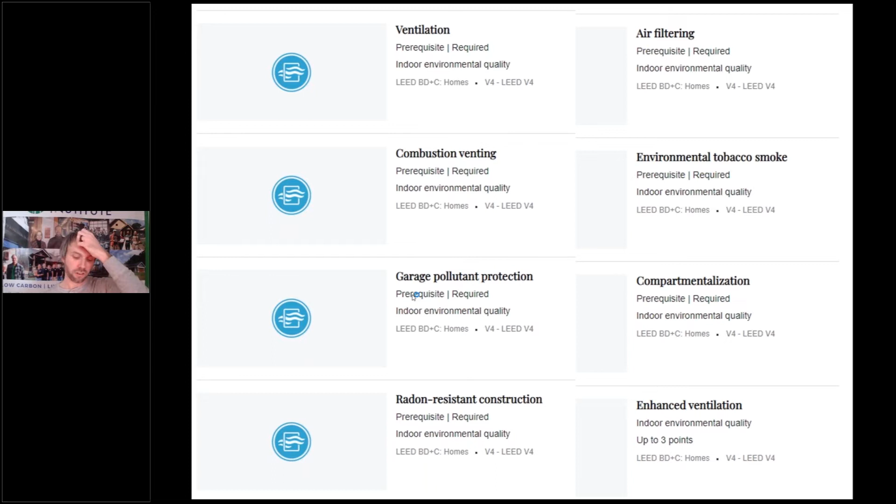Now, Passive House is not just an energy efficiency standard, and you'll hear a lot more about that, but how it fits into LEED is that it requires Indoor airPLUS certification, which basically covers many of the requirements in the Environmental Quality section of LEED: ventilation, combustion venting, garage pollutant protection, radon resistant construction, air filtering, environmental tobacco smoke, compartmentalization, sealed units - very important to keep air we breathe from going other places, especially nowadays - and enhanced ventilation. All of these items are taken care of under the Indoor airPLUS program, which is covered under Passive House now for the US version.

And so there, again, even more points taken care of there as far as your prerequisites go, and a couple points in air quality. Really goes a long way and shows that the LEED and Passive House program go hand in hand. So we'll talk a little bit more about that later.

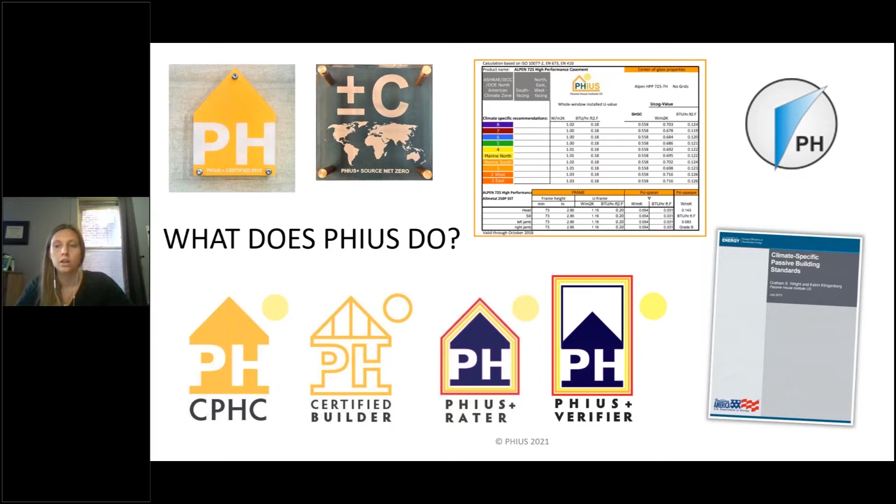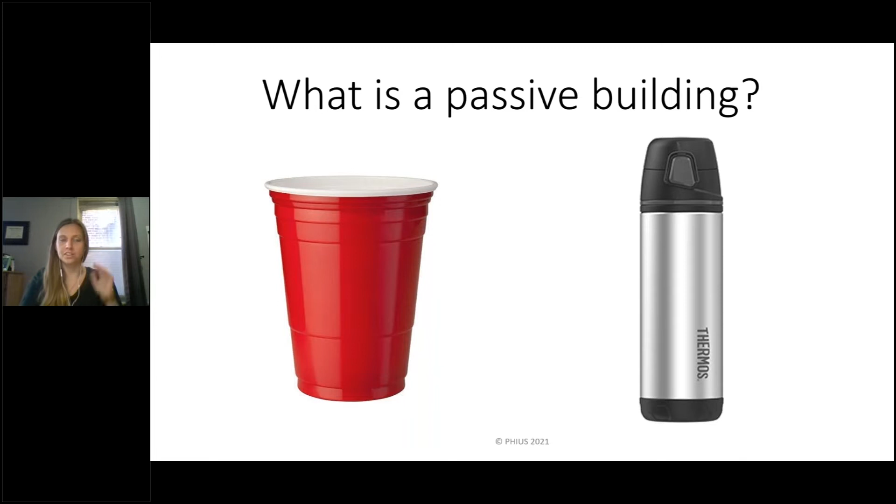So in the highest level concept, you have a basic minimum functioning thing that must meet the requirements, and that's where you can think of like a baseline or code building. And then you have something that's a little more thoughtful in design in terms of air sealing and thermal protection and durability and quality. So that's just a very high level concept about passive building.

And then I briefly, before we dove in, wanted to talk about what a passive building standard does. And I'm glad you mentioned all of that stuff up front, Brett, about the prerequisite programs, Energy Star and EPA and Indoor airPLUS.

Those are all really good programs that require some quality elements that PHIUS leans on in terms of moisture design and indoor air quality and things like that that don't necessarily show up in kilowatt hours. They're not things that passive building on its own can achieve. So I'm going to talk about what passive building can achieve, but it can't do all of these things on its own just using passive. So you have to rely on those co-requisite programs to ensure a quality building. You can't get that alone by just using passive measures.

So the PHIUS passive building standard requires design for low heating and cooling loads and bills. So that's peak and then annual, and I'll talk about that a little later. It requires design for low net energy use overall. So we use a source energy metric, and that's also our zero program, which I'll talk about. And then it also requires quality construction, which is this on-site quality assurance, third-party verified programs that are ensuring the building is a quality built building.

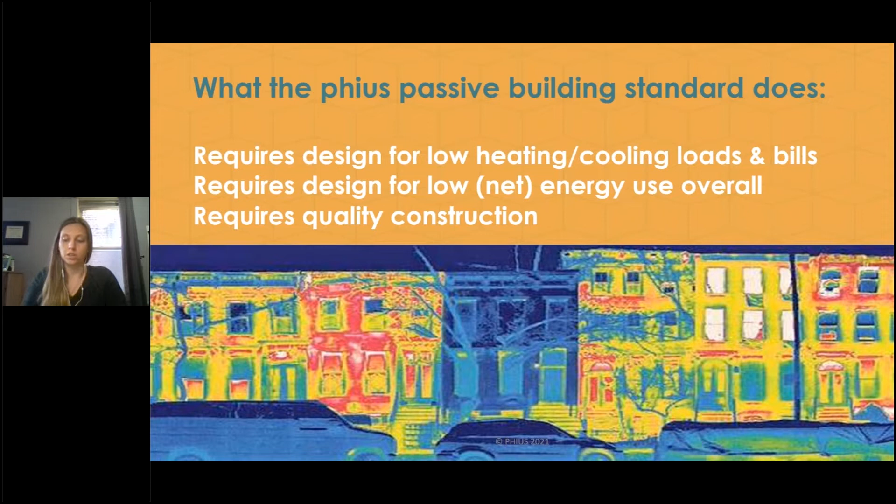Okay, so just a little bit of history. The first kind of experimental homes with passive solar stuff actually happened in the States in Urbana, Illinois. I'm in Chicago, I didn't mention that. So just downstate of here, actually where University of Illinois is. And that was the Building Research Council, and they came up with this low-cal home. Similar concept to passive solar.

And then during the oil embargo in the late 70s, early 80s, Canada said, okay, we really need to take advantage of some of these passive solar strategies to reduce the heating load. And they had all of these design strategies, really more passive solar than passive building, which is important to understand. They were more of a heating dominated situation, lots of solar gain, mass, glass, but they knew super insulation and air tightness and solar gain could help you reduce a heating load, right? They just didn't have really defined targets, but they had all the concepts down.

And then in the mid 90s, those concepts were utilized by the Passive House Institute in Germany that created a pass-fail passive building standard. And what this did is it quantified those passive building conservation measures and said, hey, you need to take these and go to this certain amount of conservation. And that's how you apply passive building practices. And you can go this far and meet these certain metrics, and that defined what a passive building was. And that standard works really well for passive houses in Germany, and was applied for the European climate zones.

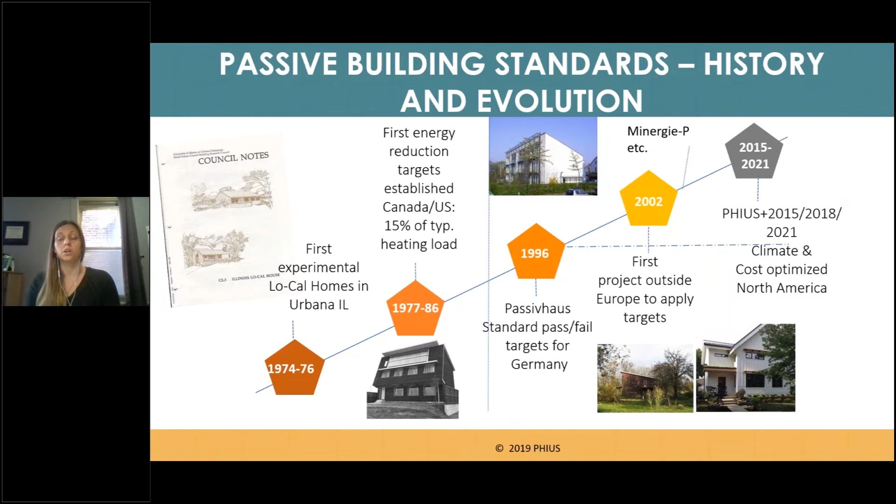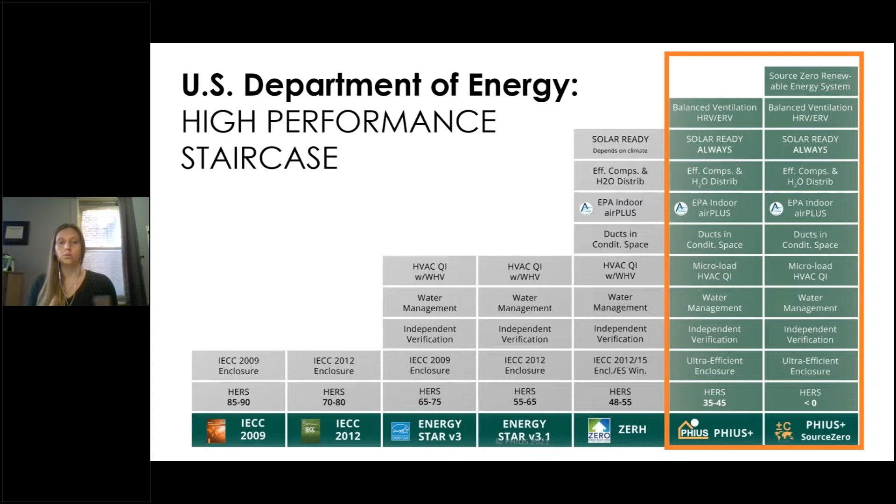Okay, so to put this in a zoomed out context, this is the US Department of Energy's high performance staircase. You can see on the far left, we're starting with code, IECC 2009-12, Energy Star, ZERH, the Zero Energy Ready Home Program. And then PHIUS builds upon those and goes a little bit further in different arenas to get to a zero building. So we have the ZERH, which is zero energy ready. Then we reduce the loads even more, add a little bit more related to ventilation quality. And then you can take renewables and get to zero. So it's a natural progression on the predefined programs we have in the US.

Okay, so now into the passive building principles. So there's 5 main principles that we generally talk about, and these principles are trying to achieve 3 different control strategies. So we have thermal control, radiation control, and air control. Thermal control is achieved through continuous insulation, and I'll talk about each of these individually. So thermal control, continuous insulation are kind of that sweater on the building, not the same size sweater for every climate, but a sweater or a coat, or a nice continuous layer of insulation.

We have radiation control, which is controlled by optimized windows and solar gains. So notice this is not passive solar. It's not all the gains you want. It's not all south glass. It's really optimizing the window and solar gain to your climate. And that's what the kind of performance targets that we'll talk about are trying to gear you to. There's limits on heating and also limits on cooling, so that you can't really go too far in either direction. You need to optimize.

And then there's air control. So this is achieved through 2 strategies. The first, super important for energy savings and durability, is airtight construction. And then because you seal up the building so tight, you now need to provide intentional balanced ventilation, and then with heat recovery, so you're not losing quite a bit of energy as you continually provide fresh air to the space. So those 2 come in tandem. You really should not do one without the other, especially when you're getting down to passive house levels of air tightness. You need that balanced ventilation with heat recovery.

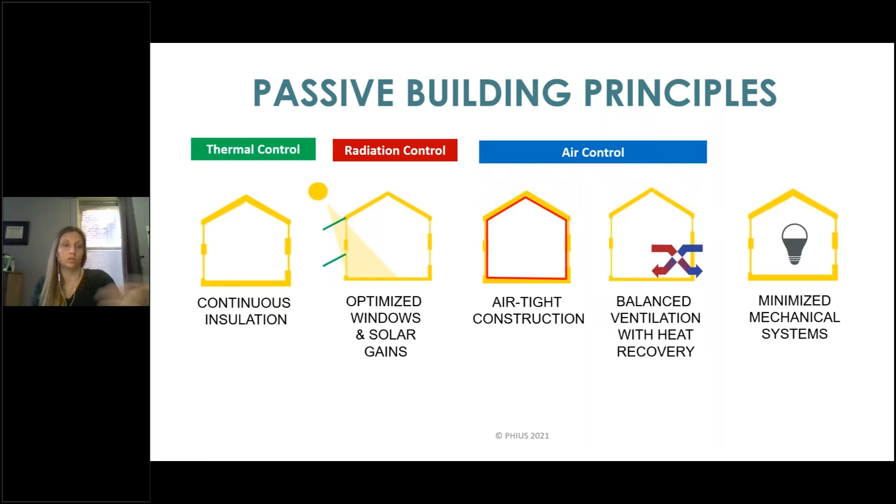Okay, so just a little bit on each. So the first is continuous insulation. This is a fairly intuitive concept, but really not just focusing on the construction of an individual component itself, like a wall, but also focusing on how that interconnects with the other components in the building, like the windows, the floor, the roof. So reducing the thermal bridging at connections between components, as well as within structural framing of an individual component. So you want the insulation to be continuous all throughout the building thermal boundary.

And one way to think about thermal bridging, if you're not familiar, is you have a nice sleeping bag, right? If it's cold out, you get in that sleeping bag and you roll over and you feel that zipper. That zipper is a thermal bridge, and that's the kind of path of least resistance for thermal transfer between the inside and outside of that sleeping bag. The sleeping bag's really well thought out, but then they have this conductive part that causes discomfort, and in buildings it could cause condensation, mold, other issues.

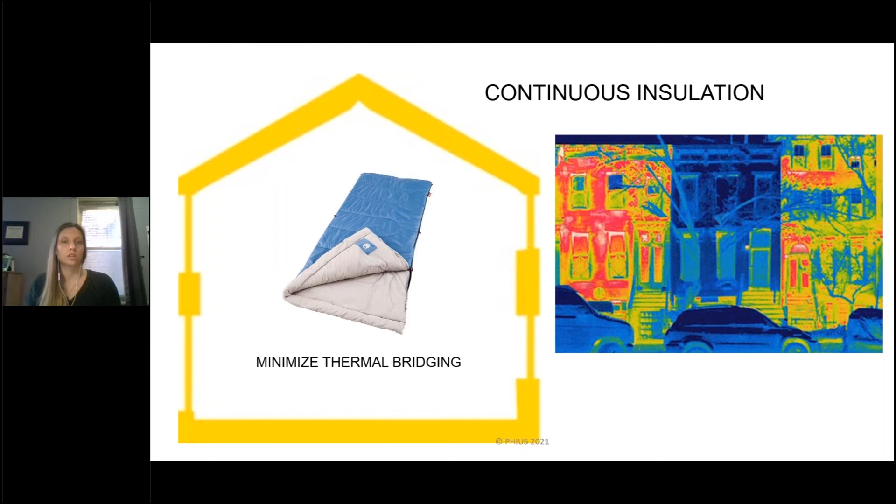Another thing about thermal bridging, shown here in the bottom, is that it provides for more livable space as well, especially in somewhere like this high rise. You can see on the left, they did not thermally break that balcony slab. So the balcony slab goes all the way from inside to outside, and that basically allows the cold to come in, or really the heat to go out. And what it's doing is it's creating a cold corner, which could have issues for mold, or it's just cold and you can't use that space.

So when you mitigate that thermal bridge or provide that thermal break, you're now creating kind of more uniform temperatures on the inside surface of that building, which again is good for comfort, but also building durability and things like that.

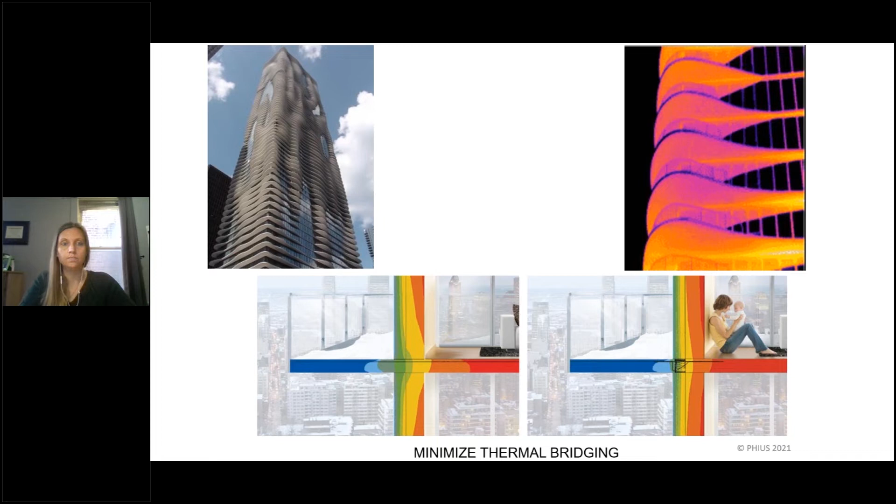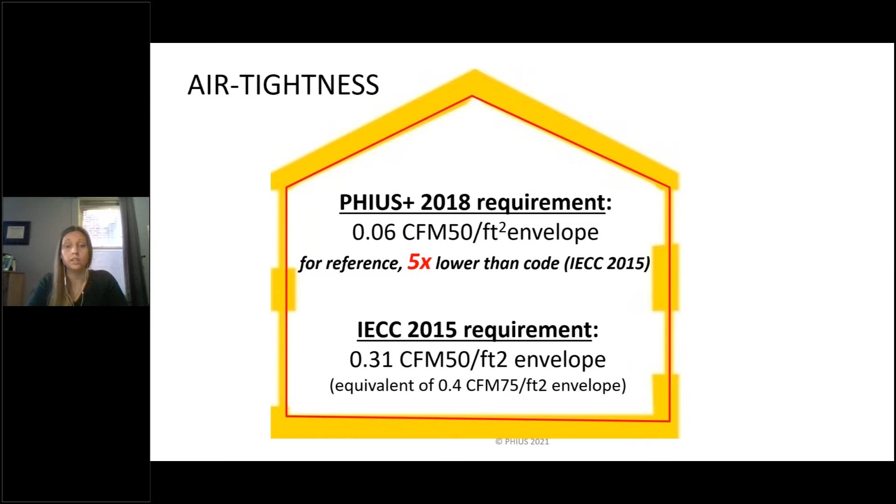Okay, so air tightness, another really key principle here. The PHIUS 2018 requirement, and 2021, sorry, missed that update there, is 0.06 CFM50 per square foot of envelope area. So it's a per square foot of shell area requirement, not an ACH requirement. But it's roughly 5 times lower than the IECC 2015, I think the requirement's the same, 2018 requirement. So it's tight. It's achievable. It's been achieved in hundreds of projects across North America, but it is tight. It's significantly tighter than code requires.

Okay, so in optimized windows and solar gain, it's pretty much required to use window frames with thermal breaks in them. And then oftentimes also, at least in climate zones maybe 4 and above, you're seeing triple pane glass in most buildings. Not all, but most. And also curtain wall systems and things like that in larger scale or commercial buildings. You're getting into kind of top of the end for the curtain wall systems that are available, triple pane glass and a thermally broken spandrel. So they exist, but it's definitely higher end of the window market.

And as I mentioned before, there's also shading strategies involved with this, depending on the building type and usage and orientation and all of that. There's ways to obviously allow for gain when you want it and block it when you don't.

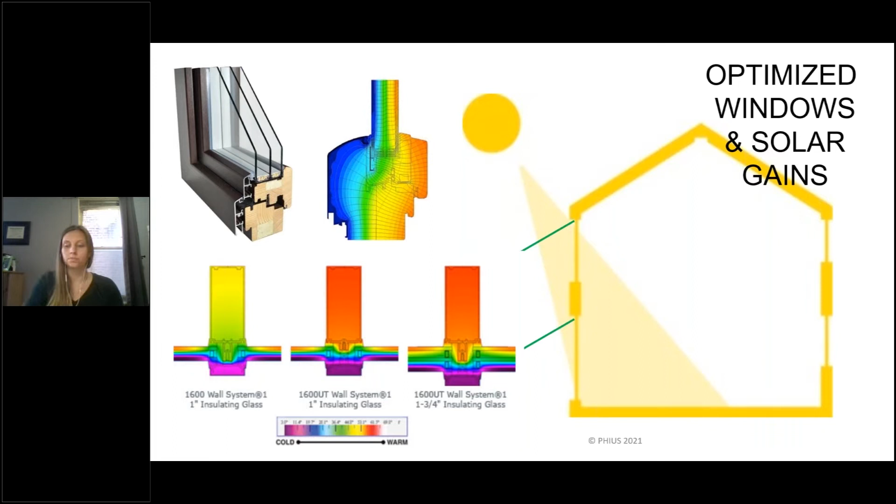Okay, so the balanced ventilation and heat recovery, again, remember, goes hand in hand with the air tightness. And this is basically using intentional openings in the building to provide fresh air in the living spaces and exhaust stale air in kitchens and bathrooms, maybe laundry spaces. So spaces where contaminants build up, you're exhausting, and spaces like living rooms, bedrooms, you're supplying fresh air. And it's a continuous thing.

And it's going through heat recovery at the core. So your outgoing air is passing through a core with your incoming air and exchanging that heat and moisture generally, if it's an ERV, an energy recovery ventilator, or just exchanging heat if it's a heat recovery ventilator. And it's also going through a filtration system. So you're constantly providing fresh, filtered air to the living spaces, which just provides a really, really high

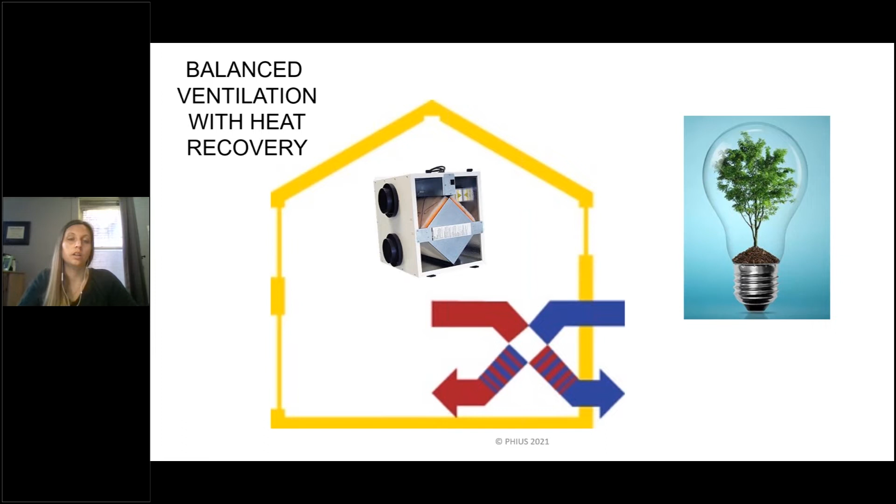indoor air quality relative to maybe a conventional ventilation system where you're exhausting from some spaces and then, based on pressure differential, air is being pulled in through other spaces, which could be through your walls or your crawl space or something that's not quite as clean as a nice filtered ERV. So it's just a more balanced approach. Insulate your envelope, seal your envelope, and then you have these intentional openings, and keep the pressure balance in there even. So you have this balanced continuous ventilation. Just provides very good indoor air quality.

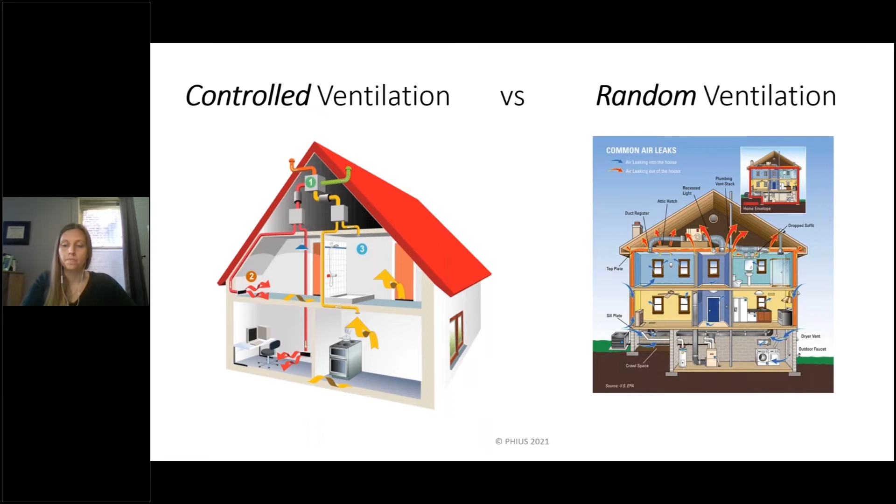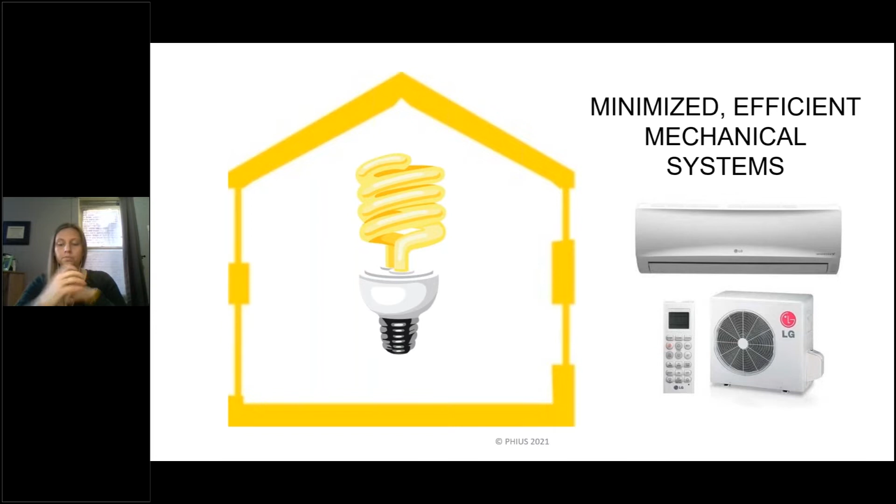Okay, so these next few slides are going to talk about the questions that we went through at PHIUS to come up with the passive building standards that we use to certify buildings. So I think there's 4 or 5 of them. So this is kind of the first overarching question: how do you set targets for investments in these passive measures and ensure quality building? So we know we can take all of these passive measures, save energy, and we also know we need to get elements that ensure quality building. So the result of that is to create this passive building standard that encompasses all of that.

So PHIUS 2021 and also the previous versions, 2018 and 2015, are performance-based passive building standards with prescriptive requirements. So I'm going to get into exactly what that means, but the core of the passive elements are what the PHIUS standard is adding to those existing co-requisite programs that Brett mentioned in the beginning.

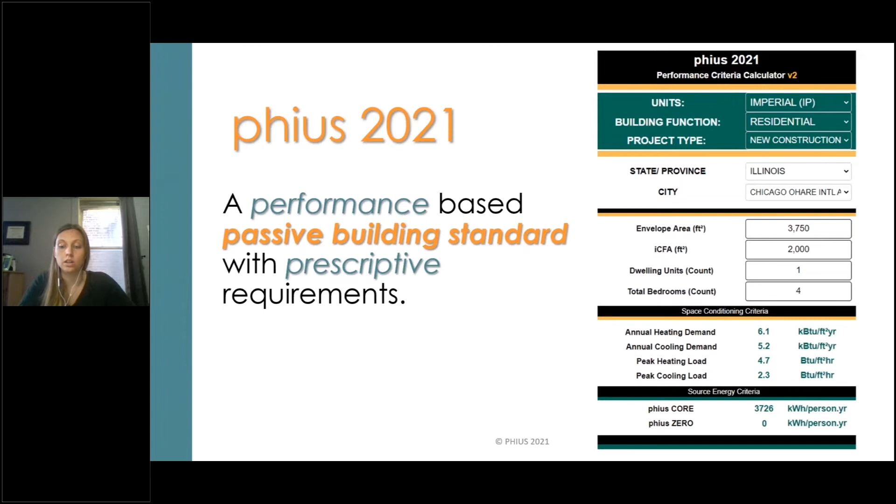Okay, so the main certification requirements are space conditioning targets, so that's heating and cooling loads, air tightness, on-site quality assurance testing and inspection. That's basically those third-party co-requisite programs, Energy Star, EPA Indoor airPLUS, Zero Energy Ready Home, in combination with some PHIUS requirements on site. And then net source energy. So what's the overall impact of the building?

And the top three are pretty much identical for every certification you achieve with PHIUS. And then the bottom one, the net source energy, the total impact of the building, varies based on if you want to go for what we call CORE or ZERO. So I'll talk through all of that, but I basically want to walk through how the different targets were arrived at for these different pillars of the standard, and then what that means in terms of a framework for a ZERO certification.

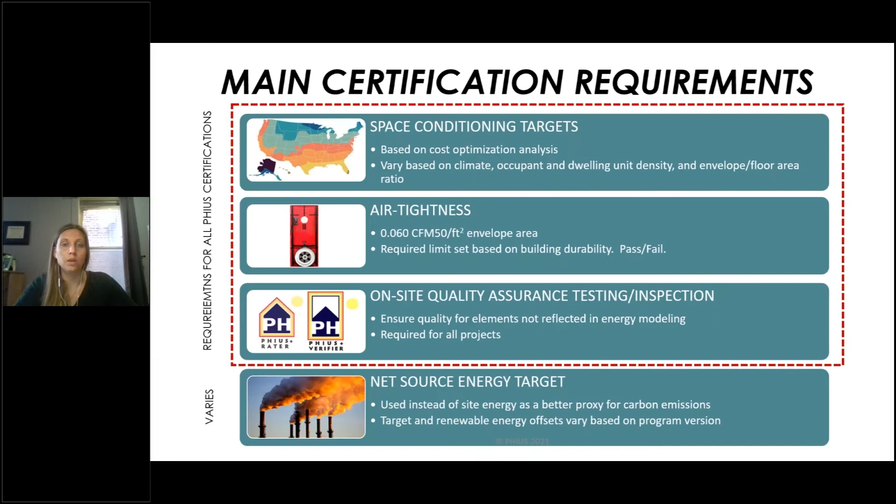Okay, so the top one, space conditioning targets. The question here was, how low can and should you go with these passive measures? Technically you could continue to add insulation to wall assemblies, roof, your floor. You could get the best windows that exist, and you can continue to save money and reduce loads, right? But eventually you hit this kind of point of no return. And we tried to find that cost optimum spot. So how low can and should you go with these measures?

So our target setting methodology was essentially a cost optimization study. We studied various residential buildings, the sizes shown below there, all the way from I think a 200 square foot tiny home up to a 10-story high rise. And essentially what we did is we set up different packages or upgrade packages for these buildings.

So you start with a code baseline and you say, okay, I want to increase my wall R value, my roof R value, decrease my window U value, add balanced ventilation with various levels of heat recovery percentages, change solar orientation for some of these. So you have all these passive building principles or measures we saw in the beginning, and you basically crank those from 0 to 100, right? So you can go really far or not at all.

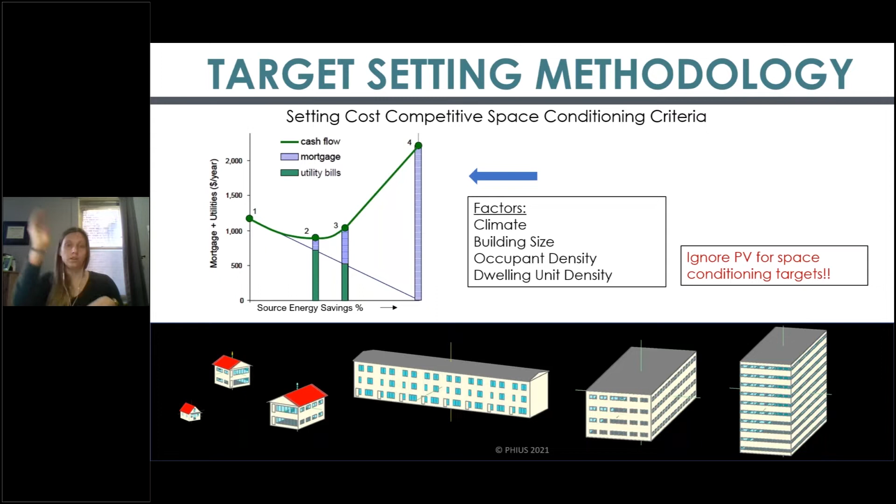And what that does is it took these buildings and created all these different scenarios, all these different combinations of implementing those passive building strategies. And what we were looking for was the one that saved the most energy for the least amount of cost. And so the cost is a combination of upfront costs. So those upfront costs and conservation measures, maybe you had to pay a little bit more for the ventilation or for the better windows or the insulation or the air sealing.

But you also save the most energy over time. Or sorry, the combination of cost is ongoing and upfront. So we have the upfront costs of the measures as well as what it costs to operate the building. And we looked at a 70-year lifespan for the buildings.

So what you see on the top right over here is the minimum cost curve. So that's that curve at the bottom, and that's where you have the most savings for the least amount of cost, which is the y-axis. So that red circled point is kind of the optimum point for that specific building, which is just one of hundreds used in the optimization. And basically what it said is you can get source energy savings around 43% relative to the baseline for actually less cost than the baseline itself when you combine upfront and operational costs.

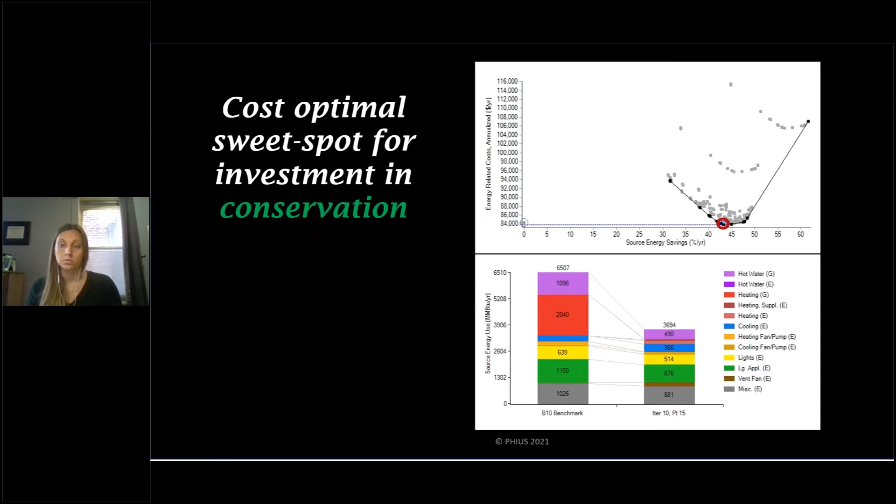And what that looked like for this specific building is kind of on the bottom right. Benchmark building, it basically did what passive building can do, which is reduce heating loads significantly and also maybe apply some conservation strategies to other things like hot water systems, lighting, large appliances, things like that.

A couple of things about this optimization: the window selections were constrained based on comfort. So we didn't let it pick all the way from code minimum to the best out there. We said, okay, you can't do code minimum, you have to do a certain U value based on PHIUS's comfort requirement for windows. So that was locked in. And then we also forced them to air seal up to the PHIUS requirement, the 0.06 CFM50 per square foot. And it also had the ability to pick a tighter airtightness, which often happened in the optimization. They said, okay, that's a really cost-effective measure.

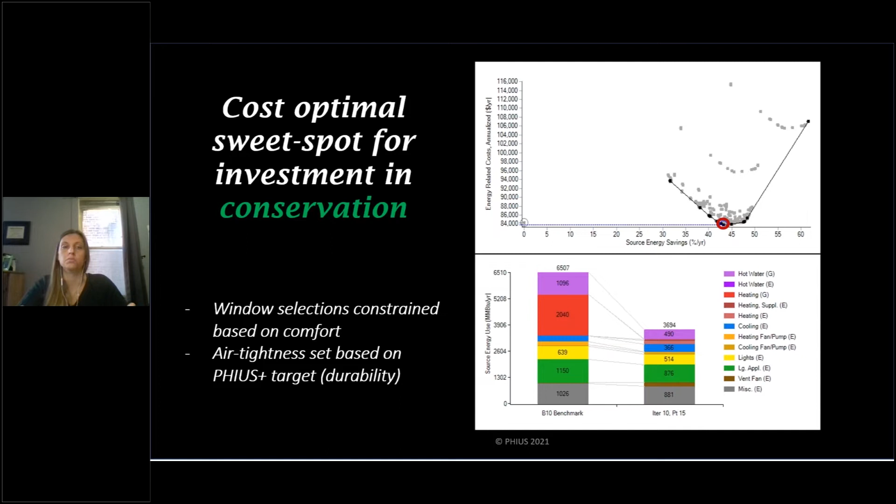So this study in setting these targets is really the core part of passive building. This is what passive building strategies can do to buildings. And what arrives from that is essentially space conditioning targets for both annual and peaks. So we have targets for annual demand, which is the total heat or cooling that must be delivered to a space to maintain a set point. So it has nothing to do with the system delivering it. It's just, I need to keep this space at 70 degrees, so this is how much I have to deliver to that space. And the passive building principles are what influence that.

And then you have the peak load. This is what's used to size mechanical systems, and this is basically what do I have to deliver to the space at the peak condition. So for passive building, it's the average of the worst 24 hours. For other programs, it might be the 99th percentile. Depends what load scenario you're sizing. But again, it's not influenced by mechanical systems. These values are only influenced by and only met by achieving passive building strategies.

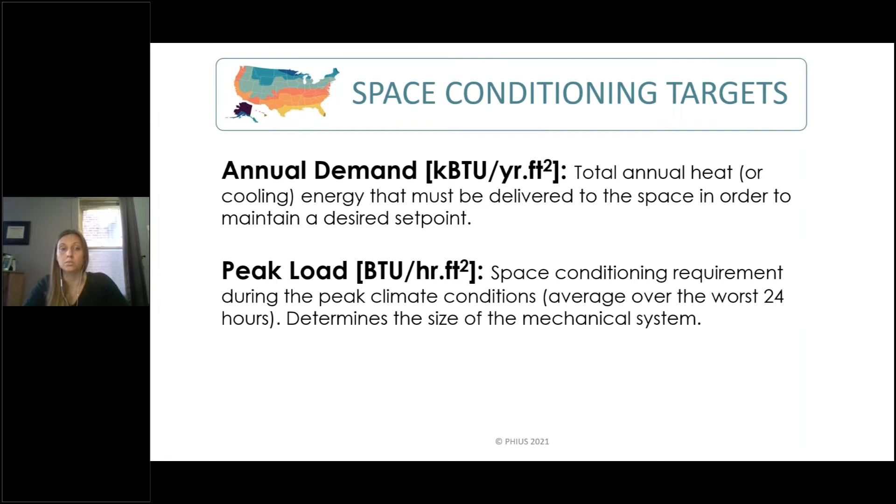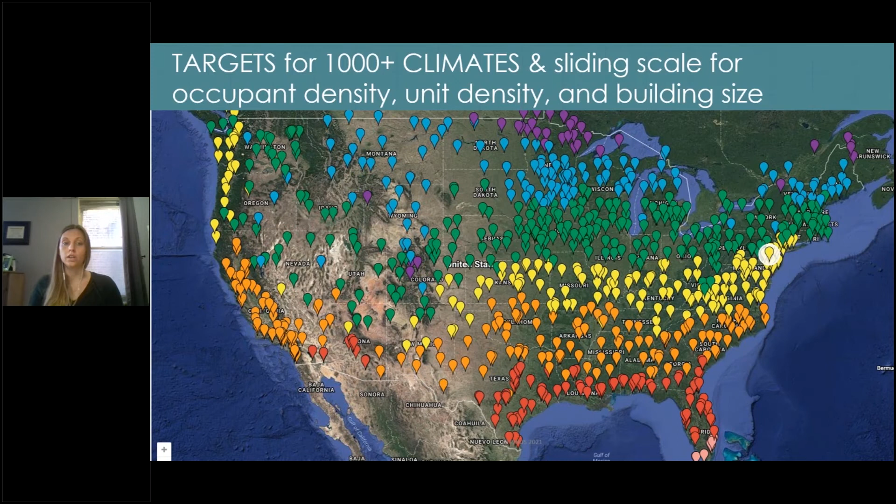What that ends up looking like is, with all those different scenarios, we studied all ends of that spectrum in building size and climate, different unit densities, different occupant densities, because these influence internal gains and internal load. We came up with different targets for all of the North American climate zones in the US and quite a handful in Canada, so there's over 1,000 locations with different targets.

The way to see what that would be for your building or project is to use our performance criteria calculator. All of the optimization work that went into this is packaged up in this tool, where you select your project type, location, and put in the building size, which we use envelope-to-floor-area ratio as a proxy for, so the shell area versus the floor area, which is also a metric for compactness of the building.

In case I didn't say it, these are pass-fail metrics, and all 4 must be met: heating over the course of the year, cooling over the course of the year, and then your peaks for heating and cooling. What this does is guide you in each direction by placing guardrails on all of these. These targets came from the results of that optimization study—how did the buildings that were at that optimum point perform in terms of these 4 metrics? We used statistical analysis to figure that out for all the climate zones and all the variations of building types.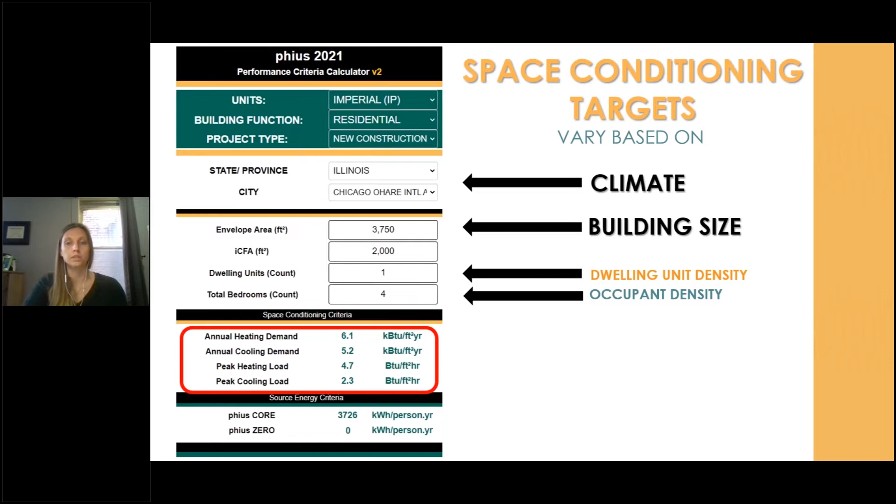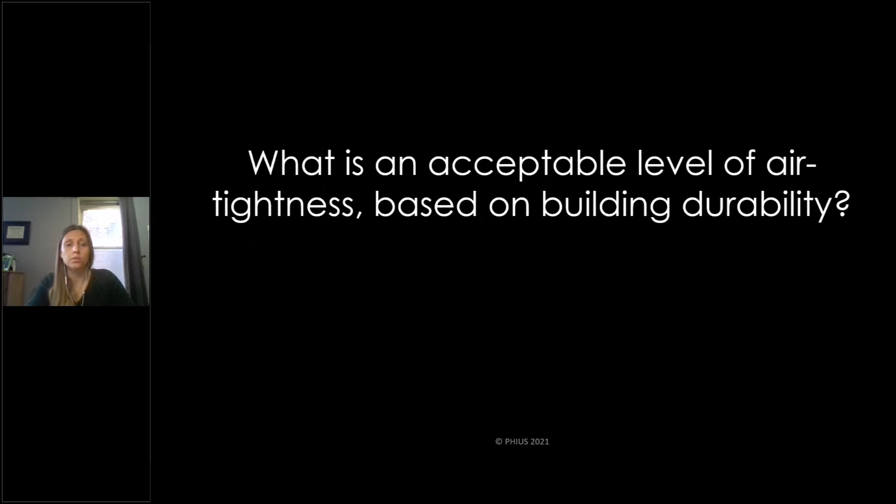Next question: what's an acceptable level of air tightness based on building durability? We know building air tightness saves energy, but we also need to make sure the building we're building is durable and long lasting. Our technical committee, and a few of them are with Oak Ridge National Lab, did studies on this—basically how to try to prevent the building from long-term rot or durability issues. They figured out an acceptable level that could go through a clear section of the building envelope.

I won't get into too many details here, but this number comes directly from that durability study: 0.08 CFM75 per square foot of envelope area, or if you track that back to CFM50, it's 0.06. There's a slightly higher allowance for buildings of non-combustible construction—the durability concern is not quite as great for those buildings without framing members that are vulnerable to mold or rot.

So it's slightly higher, 0.08 CFM50 per square foot, or 0.11. Again, this is part of a hard requirement for the standard—you must pass this result through both pressurization and depressurization tests for certification. You take the average of those 2, and that must pass this threshold.

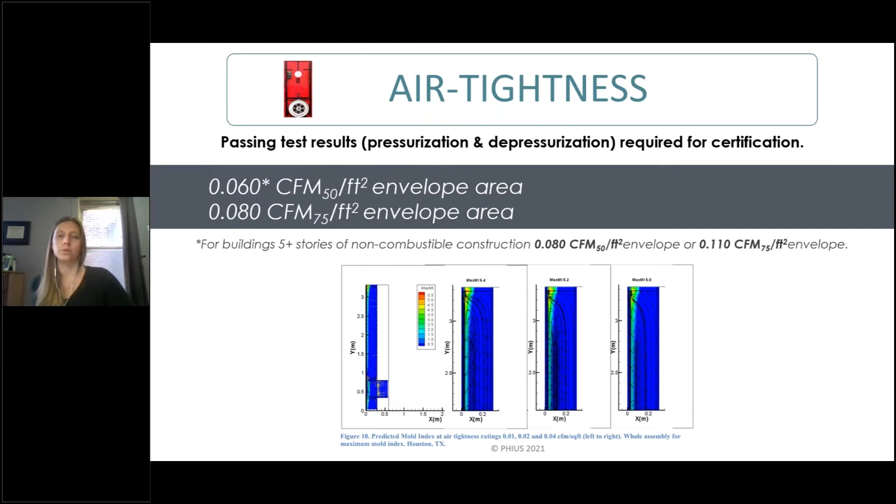And then kind of the third pillar is what are these other quality-related items that are valuable but don't show up in the energy model? So this is a really key part of the standard, which is using these great defined government-level programs for other quality-related items—the Energy Star, Zero Energy Ready Home, and EPA Indoor Air Plus. And we add a little bit to that with the blower door testing, the ventilation system balancing and commissioning.

This is achieved by the raters and verifiers, these are professionals that we train. The rater is built on the HERS rater designation, the verifier is more of a big building aspect to it. I can't stress enough that this part of the certification is super important to actually getting the building you're designing to achieve what you intended. They're testing to make sure everything that's in the plans is what's in the field, making sure the systems work, everything's commissioned, and the air tightness is met. Really critical for the building success.

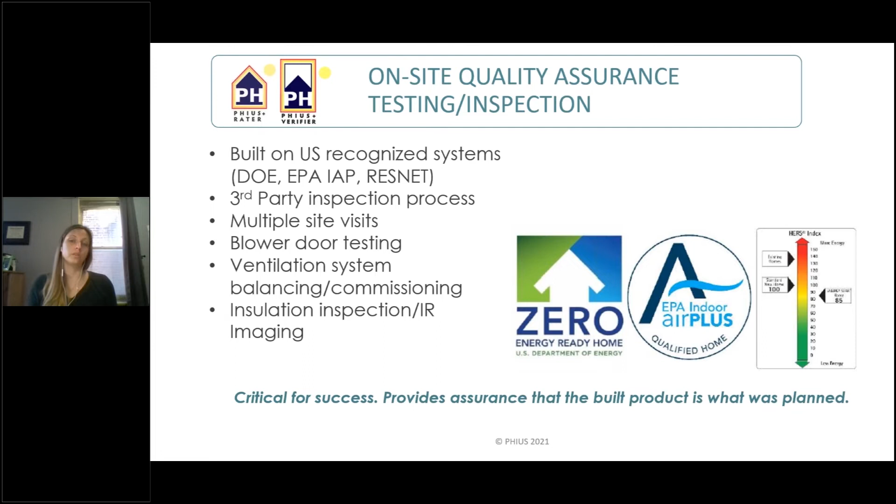Couple other requirements. We have a requirement for window comfort. So basically there's a maximum U value per climate that you can use for your window, and it depends on the height of the window as well. The larger or taller the window, the tighter that requirement gets.

You need to make sure the window also has limited risk of condensation. Generally, if you're meeting the comfort requirement, that's not a problem. We generally see issues with the condensation risk on something like a curtain wall, spandrel, or similar, where the frames really aren't too great.

We also have moisture control in assemblies that we limit or review. So that's looking at the hygrothermal properties of the assembly—what's the vapor profile of the assembly. We have certain things that just pass by inspection for PHIUS certification and certain things that require a deeper look or a deeper analysis.

We also look at moisture control at unavoidable thermal bridging. So something like one of the thermal bridging slides at the beginning where you saw that balcony slab—that corner at the interior of the balcony slab could create a temperature cold enough to grow mold. What we do is make sure, okay, if you have that thermal bridge and you can take the heat loss, fine, but we make sure there's not actually going to be mold growth there through a simulation in THERM to see what that temperature is at a critical test point or critical condition. So even if you have thermal bridging or you can't avoid it, we make sure there's not going to be a risk of mold growth at that corner.

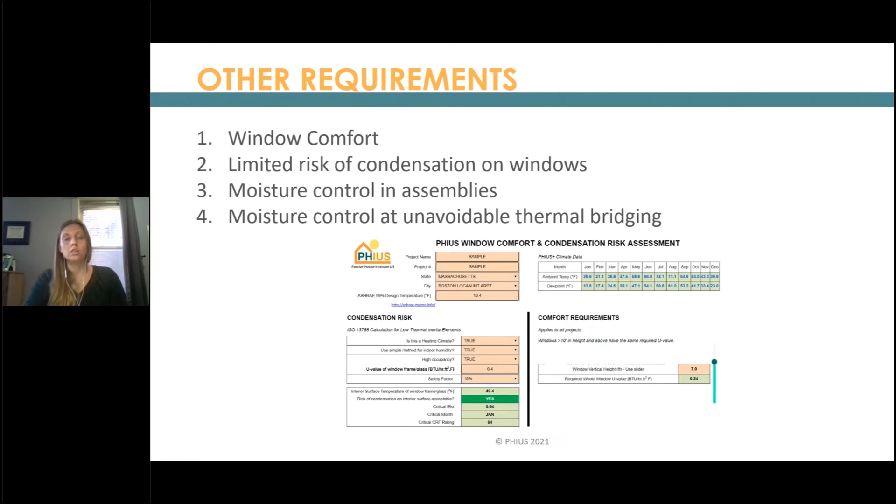Okay, so the last one is related to source energy. So when do you switch from conservation—when do you stop with conservation and turn to renewables to offset source energy? We talked about how you can continually add insulation, improve your windows, get a better HRV or ERV, get more optimized solar gain, but eventually you're pushing too far. You can get the best heat pump out there, the best fridge, everything that goes in the building, but eventually you hit a roadblock or a stopping point with conservation. And if you're actually trying to get to zero, you have to turn to renewables. Maybe it makes sense to turn to renewables a little before buying top-of-the-line everything. It depends—this is a question we tried to figure out and answer with these tiers.

Source energy, for those that aren't familiar, is essentially just a better proxy for carbon emissions because it takes the site energy used at the building—what shows up on your utility bill—and multiplies it by a source factor based on the fuel type. So for natural gas, that's a 1.1 source energy factor, and for the PHIUS 2021 standard, for the US average grid electricity, that's 1.8.

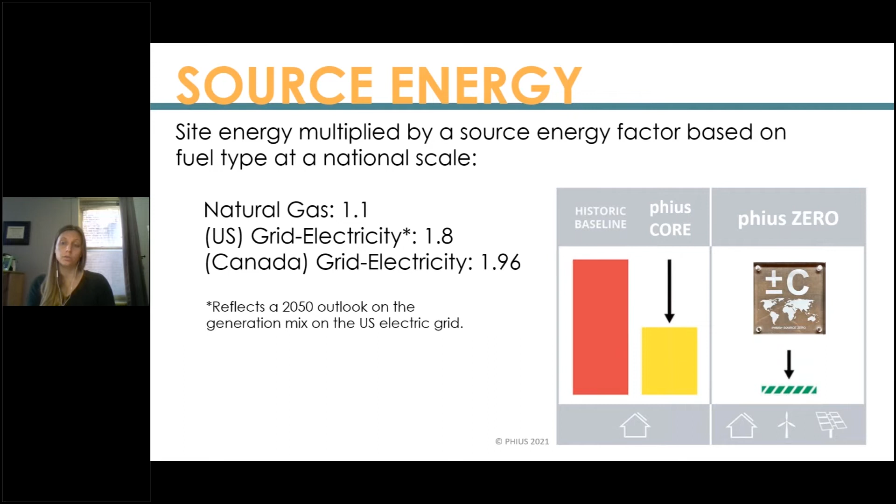So another way to look at this is we have a baseline building. We use all the passive building strategies plus some other active conservation strategies and get that really good building at core. And then we can chart all the way to 0 by adding on-site and off-site renewables to get to 0.

This is net zero operating energy. We're working on things related to really taking time of use into account, more of a grid citizenship, understanding that different kilowatt hours of the year aren't all created equal, and a net accounting doesn't really address that. But this is where we're at right now in terms of the certification standard.

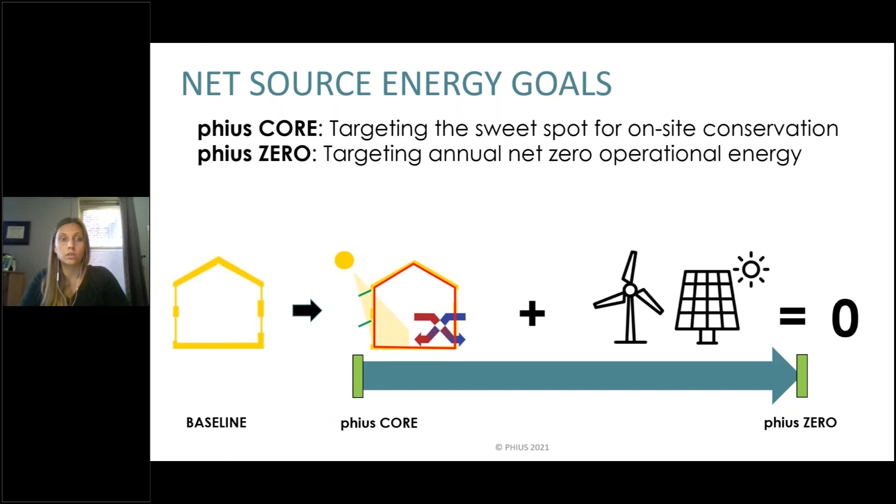The budgets here are the total limits for residential buildings, per person, and for commercial, per square foot. For core, which is that core main conservation level, the residential limit varies. It's a sliding scale based on, again, unit density and occupant density.

This is really because you don't want to penalize a smaller building for having more people in it. Or it just needs to scale to appropriately set something that's a conservation target and not something you need to use renewables for. It's a per person limit because you don't want to penalize something that's a denser building with more people, like a 500 square foot apartment with 2 people in it versus a 5,000 square foot single family home with 2 people in it. That's going to look better from a square foot perspective, but worse from a kilowatt hour per person per year. So we're trying to limit the very big buildings with few people in them.

The 0 target's always 0. For non-residential buildings, it's per square foot again. This is kind of a base number, but there's additional allowances for process loads on a case-by-case basis. So if there's something inherent to the way the building is functioning, those must be added to that allowance. This is for all the main things in the building: heating, cooling, general lighting, ventilation, things like that. But then additional allowances may be added to that core target. And then again, 0 is 0.

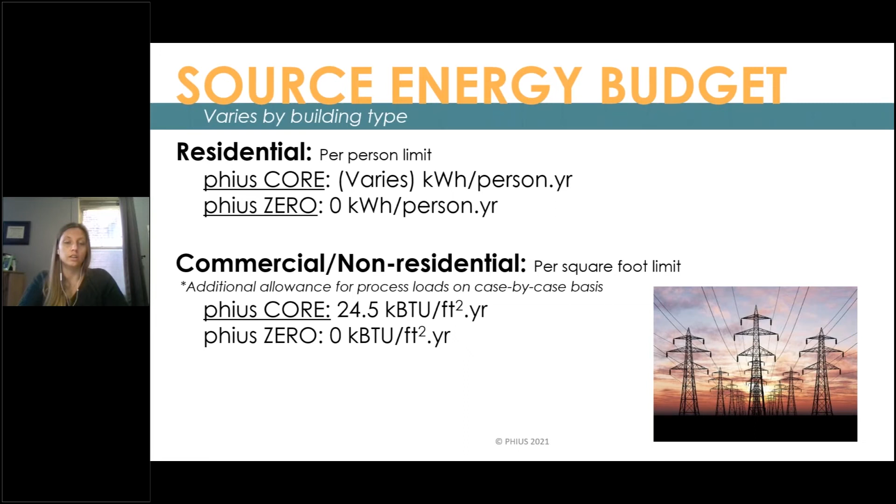So when we look at the 2 different levels, there's different ways that renewable energy is treated. For core, basically the only thing that counts is on-site renewable energy, and it only counts what you can use while it's being produced. So that means if you have a solar array on your roof that is producing over the course of the year what you're using over the course of the year, you only get to account about 1/3 of that to actually meet your core source energy target, because a lot of it's going back to the grid. You're only able to use about 1/3 of it while it's being produced, and no offsite renewable energy counts. So core is supposed to remain at the building level.

Again, renewable energy is not required to meet the target, but is a viable strategy to meet the target. With the ZERO certification, it's mostly aligning with the ASHRAE 189.1 Appendix J and the way Architecture 2030 looks at this, which is basically saying that on-site renewable energy counts the most and the least is the renewable energy certificates. So every kilowatt hour of on-site renewable energy counts to offset 1.

And then in between that, the other off-site strategies like directly owned renewables, community renewables, virtual power purchase agreements, things like that that aren't on your site, but still have quite a bit of regulation to make sure there's additionality and things like that. Those count at 0.75. So every one of those offsets 0.75 at your site. And then renewable energy certificates, basically every 5 of those offsets 1 at your site. So they're just weighted differently, basically based on the value of the different types of renewable energy.

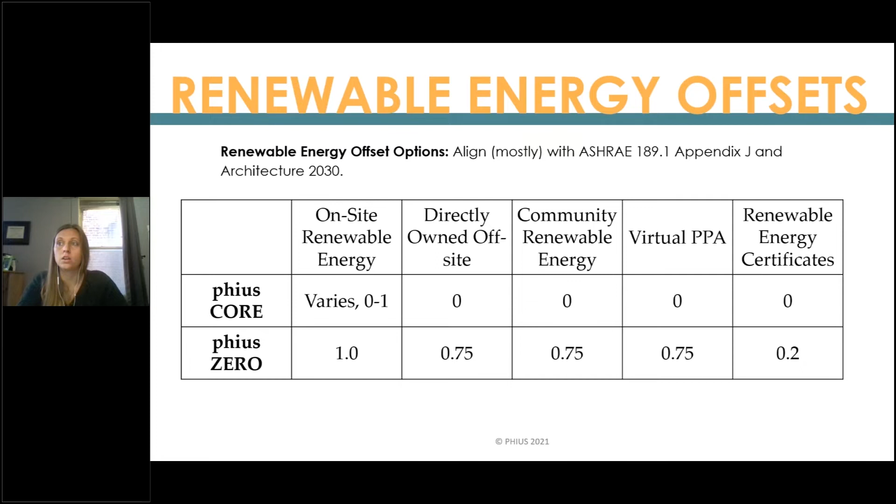Okay, didn't realize this was animated.

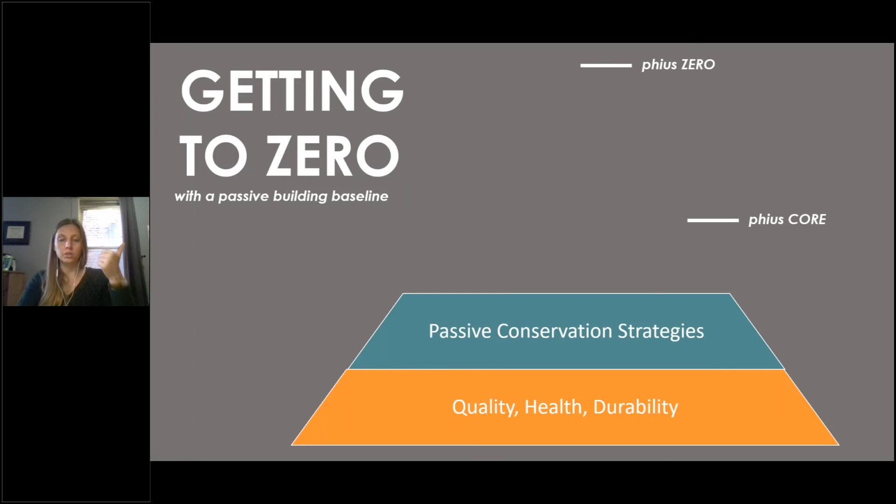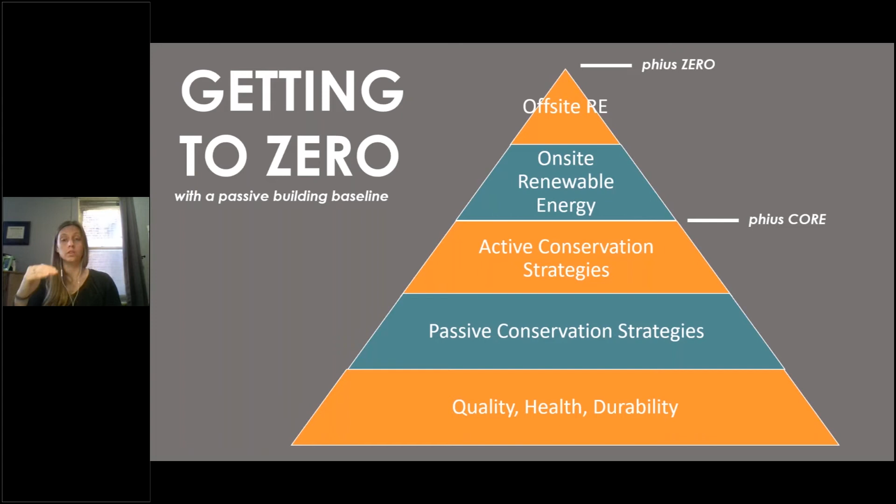Okay, so talking about getting to zero with the passive building baseline. In this ZERO standard, the hierarchy here is we want to make sure we have quality, health, durability. We implement our passive building strategies and we get our active conservation strategies, and then we've hit CORE. Then we've got on-site renewable energy and off-site renewable energy. So this is the way the PHIUS ZERO standard is set up in terms of hierarchy. You must do the bottom to get to the top, and the bottom strategies are more important to implement first than the top. So that's the way that the program works.

Some of you might have heard of the Zero Code, created by Architecture 2030. I think this is a little bit outdated. They have a slightly newer standard reference, but they basically say design an energy efficient building, use all these strategies. They use 90.1 2016 as the minimum standard, and then they say, okay, do the rest of the energy needs with renewable energies. So this is what you use based on 90.1, and then everything else, just get that same amount of renewables and you're at zero.

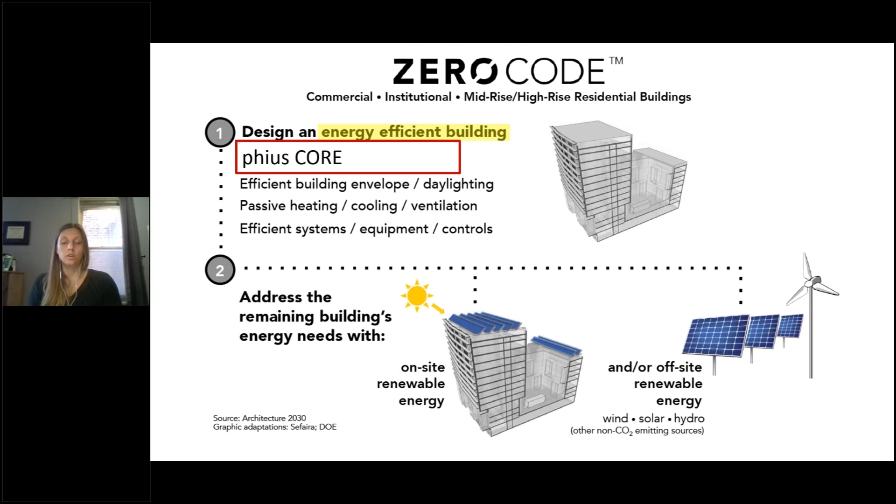And we pretty much follow the same framework, except instead of just ASHRAE 90.1 at a certain level or code, we say push further, go to CORE, that's the conservation target, and then address the remaining building needs with renewable energy. So we're pretty much in line with the 2030 Challenge.

And one way that was really great to see that represented was in a recent Chicago Architect magazine article that pointed out only one firm in the greater Chicago area met the 2030 Challenge, and that was one of our longtime certified passive house consultants, Tom Basset-Dilley Associates. His firm was meeting the 2030 Challenge, and they're a firm that's committed to doing all passive building. So they're perfectly in line, and the people that are using these strategies are aligning and meeting that 2030 commitment. So it was really great to see the synergy there.

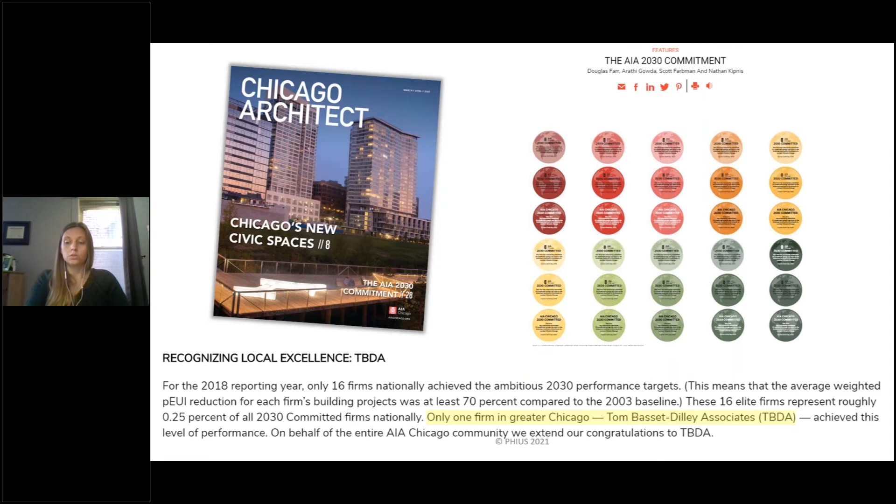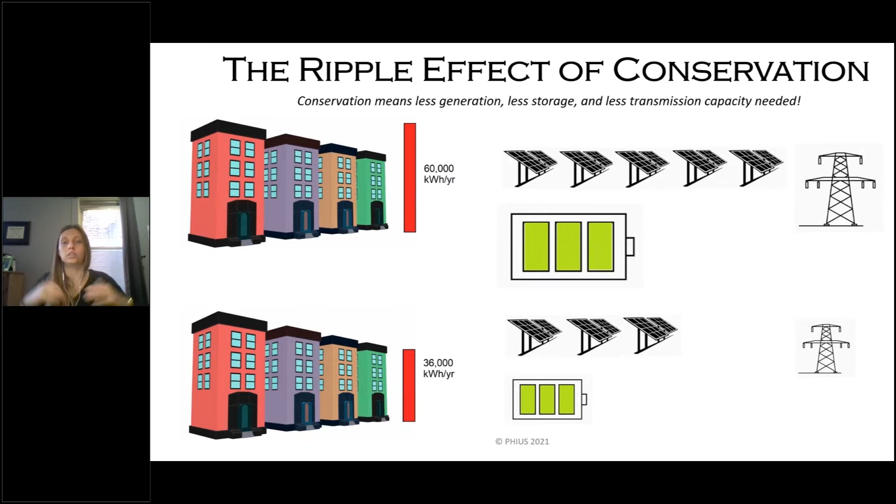If we look outward from the building boundary, this is kind of for a whole separate presentation, but it's important to understand that there is a ripple effect of conserving on site. As we're thinking about transitioning to a full renewable energy future, we're not only replacing the existing infrastructure, but we're also introducing a lot of intermittent variable resources that need additional transmission to get to places and also need storage to make them dispatchable.

So essentially, if we can reduce the building load on the left, we can reduce the amount of renewables needed to offset that. We can reduce the amount of storage needed to make that renewable energy useful or dispatchable, and we can reduce the amount of transmission needed to get that to and from the locations where it's needed. So there's a ripple through the whole system outside of the building boundary that's not included in the optimization studies, but it's something to really be considerate of, especially as we're all trying to get to a cleaner electric grid. We have to understand that there are challenges associated with more renewable energy.

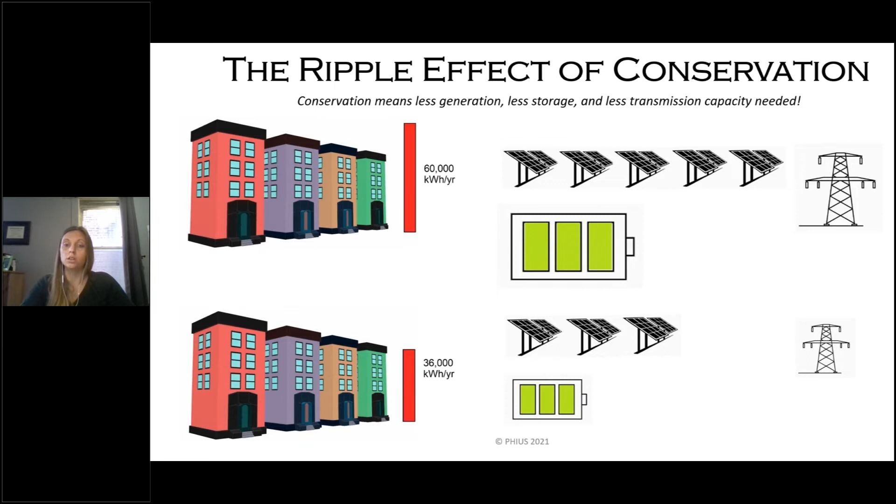So there is a big difference between this top set of row homes and the bottom set, even though they're both net zero on paper. The way they're impacting past their building boundary is quite different. So we're really aiming for that lower set and striving to show that conservation is a really, really key part of facilitating more renewable energy into the electric grid.

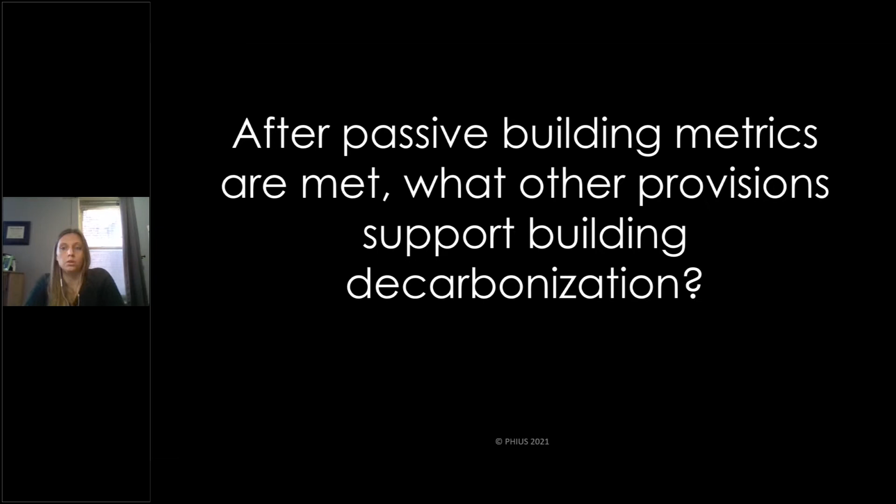Okay, so then one new question that we addressed with the 2021 standard is: after passive building metrics are met, what other provisions support building decarbonization? So here we are back at combustion, looking at combustion and electrification. So we have the PHIUS CORE, again, that conservation strategy. Combustion's okay, but electrification readiness is required.

So this basically means anything with combustion, water heater, space heating, cooktop, dryer, you need to have the infrastructure in place so it can be replaced with electric appliances, maybe upon the next maintenance cycle or in the future. And then, I'll skip down to ZERO, no fossil fuel combustion is allowed with the PHIUS ZERO program. So you can do CORE and do combustion, but if you want to go all the way to ZERO, no combustion allowed. The CORE prescriptive I will get to later, but also no combustion allowed.

I'm going to pick up my pace just a little bit.

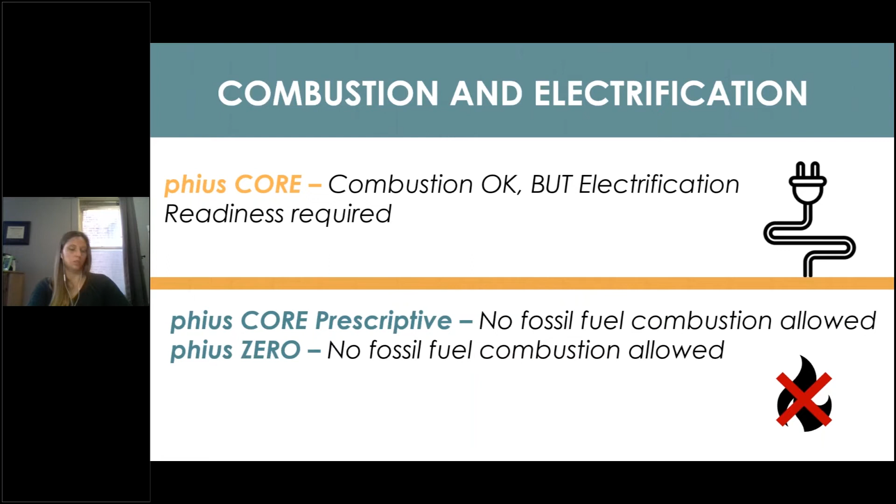So something new with the 2021 standard is a requirement for electric vehicle readiness, based on the number of parking spaces. For each dwelling unit, if parking is required, one EV ready space is required. This is really similar in concept to solar ready, right? A dedicated branch circuit, running the conduit. The cost of this is very low to implement during construction, but a lot more expensive later on, when you actually want to add the electric vehicle charging. So we have the EV ready requirements and then EV capable spaces, which do a little bit less than EV ready. I won't go too deep into those.

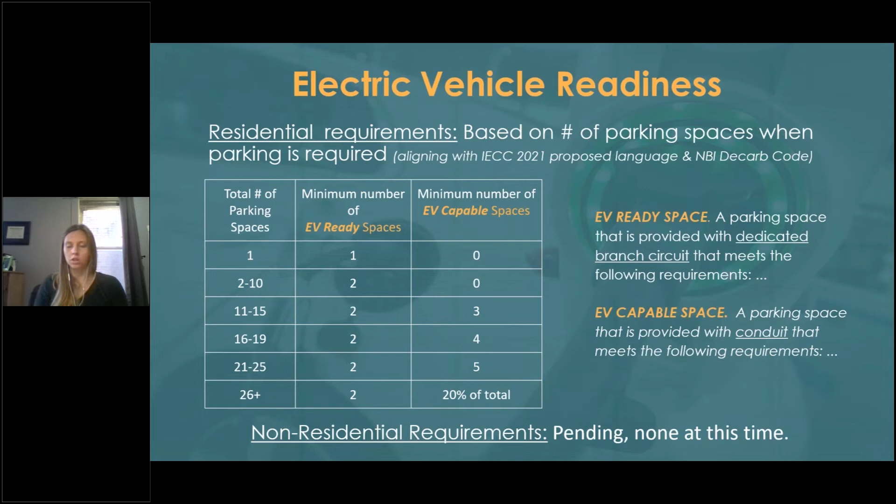Okay, so the certification process, we'll dive into that. But first, some numbers to give you a scale of where we're at. Roughly 7,200 units, this is a little outdated, I apologize, as of the end of last year-ish, and roughly 8 million square feet across the US. The graphic on the right shows geographically where that's at. A lot of heavy concentration in the Northeast and West Coast. So we're seeing it everywhere, but really a lot on the coasts, and a lot of that's driven by incentive programs in different areas.

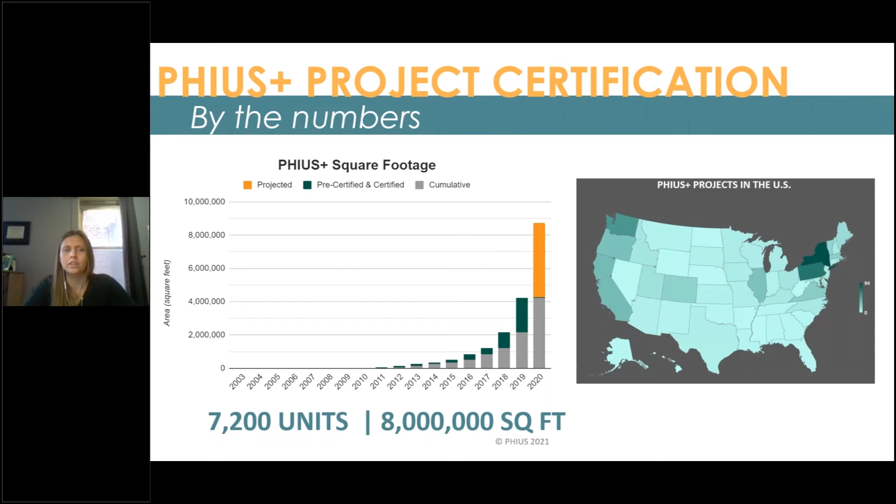The certification process is two parts. The first part is a design review, a pre-certification. The certified passive house consultant submits the project, and then it's a back and forth review process with PHIUS. This should all happen while the project's being designed, not built, because pre-certification is intended as consulting and points out red flags. If it's already built, you can't address those, and the project could have issues, worst case, or just not be certified because it can't pass due to modeling errors or hygrothermal red flags. So you want to get your design pre-certified before construction starts.

And then there's the final certification. While the project's being built, there's on-site testing from the raters or verifiers throughout construction, reviewing insulation installed, doing preliminary and final blower door testing, ventilation commissioning, and basically making sure that what was designed is actually what was built. If not, they point out the delta, and we true up the energy model. The final energy model must still pass.

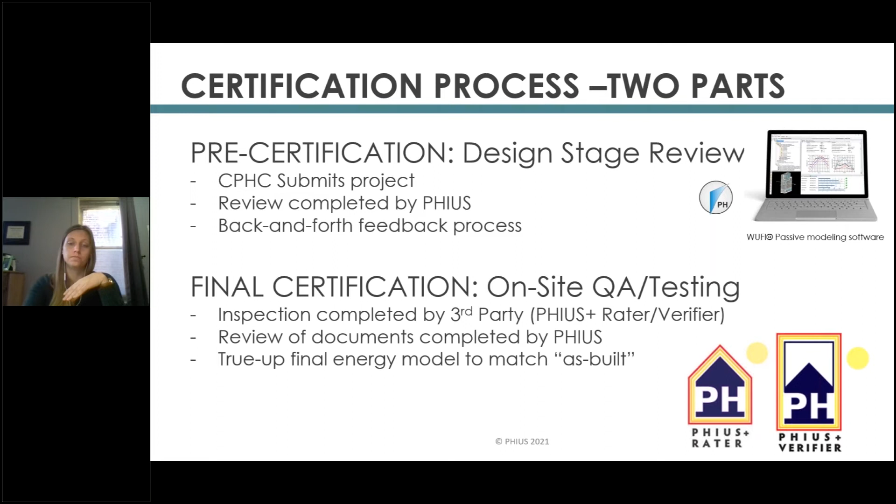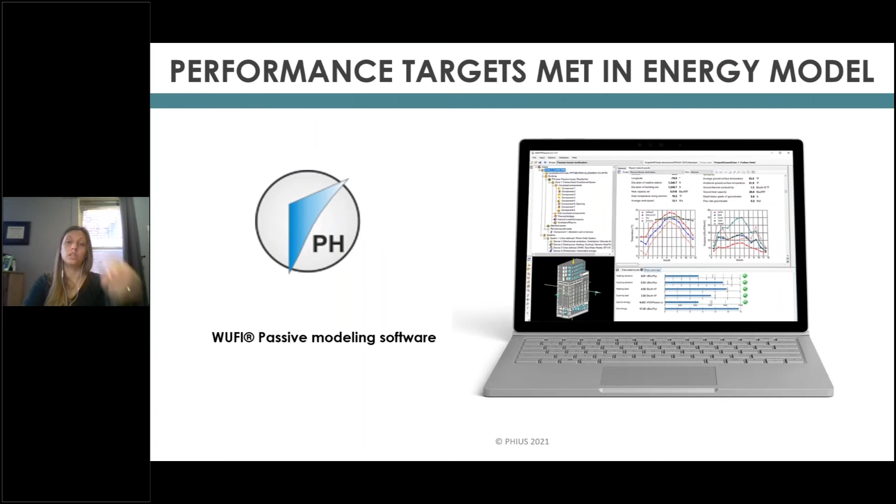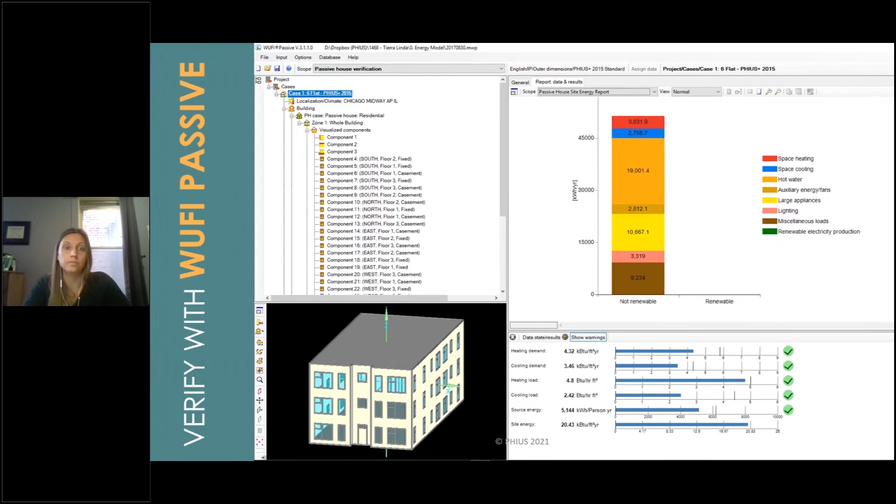The performance targets we talked about, the annual demands, peak loads and source energy values, are met in an energy model. We use WUFI Passive energy modeling software. It focuses on showing compliance with those five targets, down here in the bottom right: the demands, the loads, and the source energy. It's built specifically with the various levels of the PHIUS+ certification program within it. And then we have a quality assurance workbook for single family, multifamily, and non-residential projects, which has the prerequisite programs per level built in, as well as the PHIUS requirements. This is what's used by the rater and verifier.

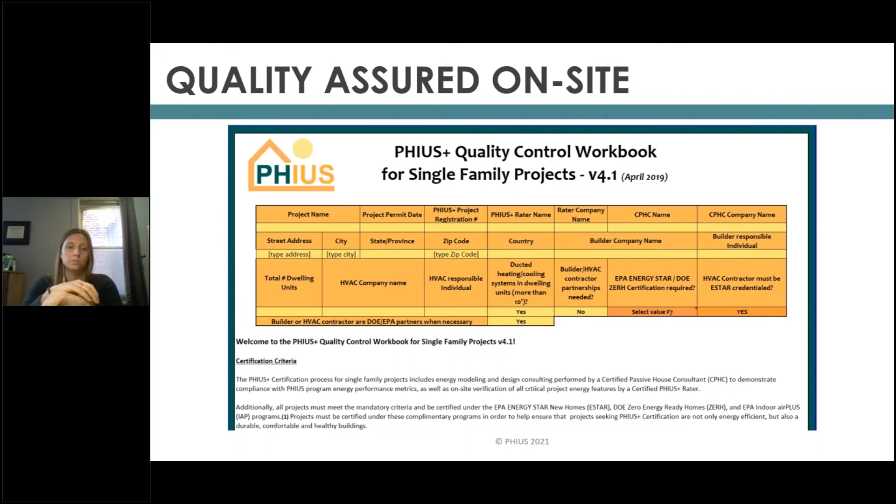Lisa, can you confirm that that's actual utility data, like a full year's worth? And is that normalized for weather variances? No, so the models were not changed for weather. They're using your certified model. Sorry, not the model, the utility bills. They're not normalized. No, it's actually what was used in the building. Okay. Interesting. And so what is that, a 90% accuracy or so? Yeah, it's 93. It's pretty close. Fantastic. Thanks for clarifying that.

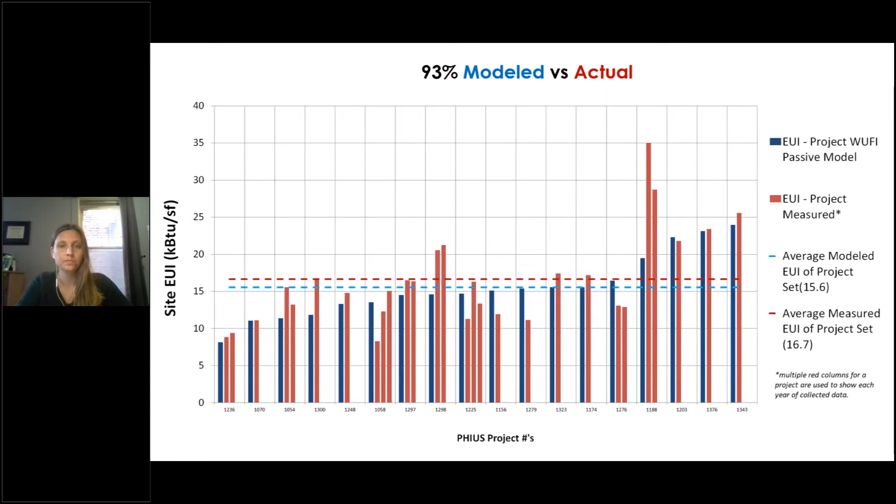The mechanical system performance, both of them have heat pumps. We have slightly higher HSPF for the PHIUS building, same SEER, so that's heating versus cooling efficiencies. Water heater efficiencies, we've got an electric standard water heater with IECC and a heat pump water heater for the PHIUS project. And then the appliances and lighting all stayed the same. They're all the Energy Star median values.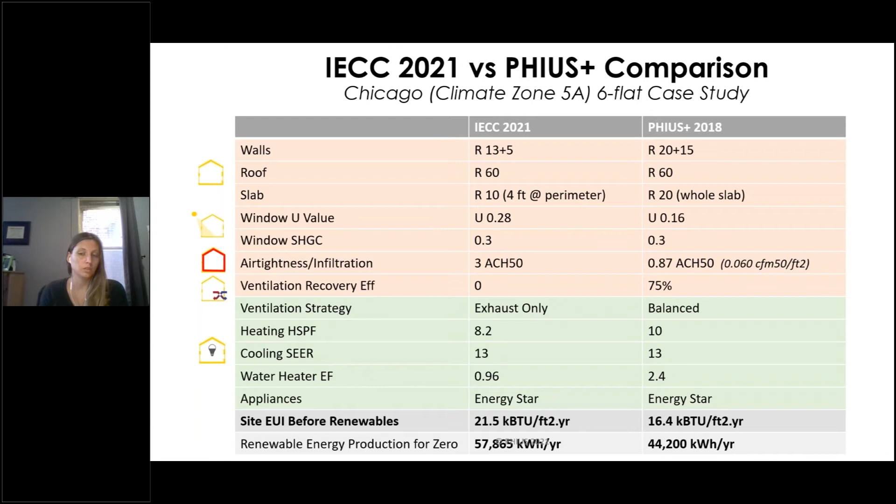So what we land on here is an EUI before renewable energy, so whatever you use those conservation strategies to achieve, of 21.5 for the IECC and 16.4 for the PHIUS+ building. Again, this is before renewables. And that's still a 24% reduction in energy use in the building, even though you're comparing to one of the latest and greatest codes. So there's still room for improvement beyond codes. Quite a bit of low-hanging fruit that can be implemented and save a lot of energy there.

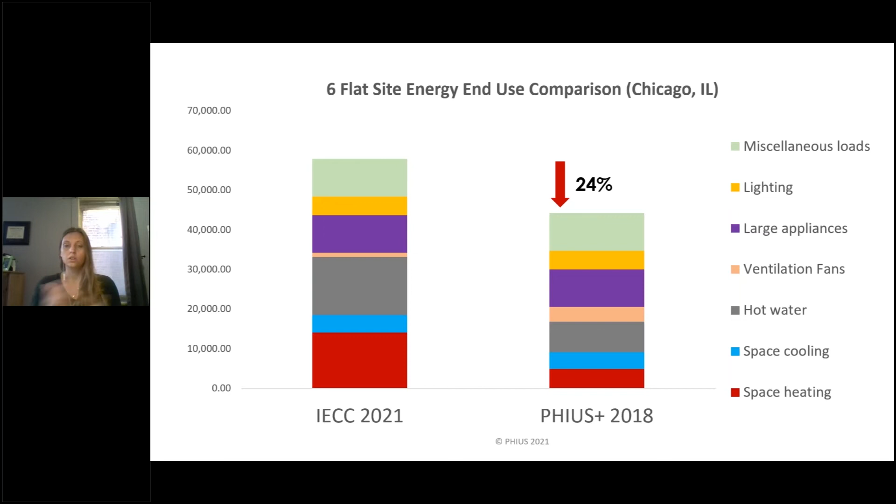Probably the biggest delta comes from the combination of the balanced ventilation and the air sealing. If you can only go from IECC to PHIUS on some elements, do those two elements. The wall insulation and windows are not going to get you as much in the energy savings or in the air quality realm. So I think that's really still the biggest delta between the codes and what PHIUS is promoting here.

Okay, so I'm going to very briefly talk about a new approach, a new alternate approach for PHIUS CORE, which was launched last night. So we had that, remember, the PHIUS CORE and ZERO. So this is your conservation, this is your good building, staying on building site approach. So this is kind of the hierarchy here.

It's limited in scope. So the first question you'd have to ask if you wanted to take this approach is if you're doing a single family, duplex or townhome. If you're not, boom, you're over to the left. You have to do the energy modeling with WUFI and you're in the performance path. If it is single family, duplex or townhome, you can continue on the right. And if you're going to not do WUFI Passive modeling, then you get down to CORE prescriptive. And I'm going to talk through kind of what that means very briefly.

You can also see the REVIVE on this slide. The REVIVE is essentially the retrofit version of each standard. The end performance targets of CORE and CORE REVIVE are the same in terms of what you're achieving in energy performance in a building, but where you're coming from is different. So REVIVE has a different kind of designation. You can also see here the two levels where combustion is allowed versus not allowed. CORE prescriptive, not allowed, and ZERO, not allowed.

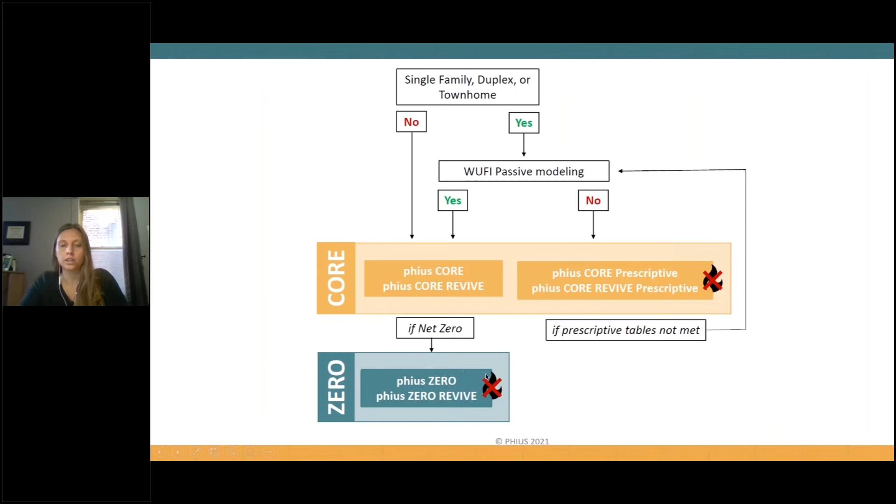Okay, so the CORE prescriptive basically prescribes elements in all of these different areas. At the high level, we have different scope limitations, so only certain buildings qualify to use this prescriptive path. And then once you weed out those, the green boxes are essentially the sections of the standard that address the passive building elements. So you're looking at requirements for solar protection, air tightness, heat transmission in opaque and transparent components, mechanical ventilation requirements, compactness requirements. So the building can't just be the craziest shape. We limit that. And then moisture risk limitation from both an opaque assembly and a transparent assembly perspective.

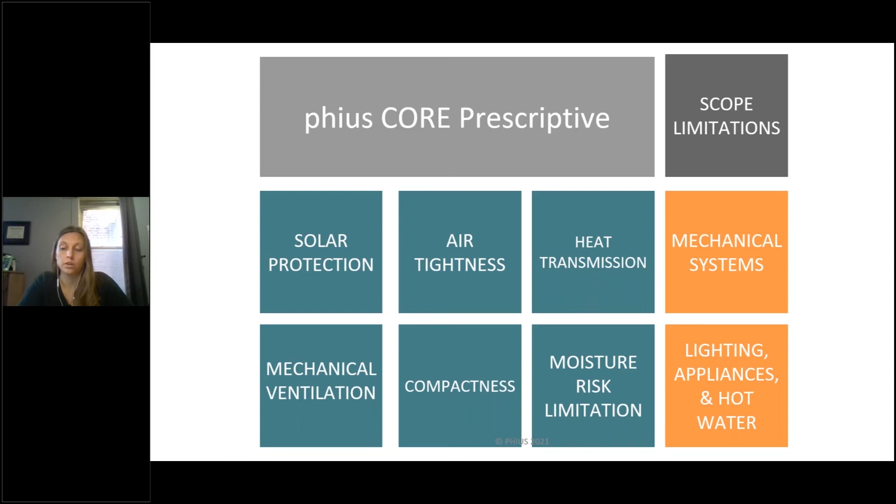So it creates requirements for all of these different passive strategies. And then there's also requirements for active strategies, such as mechanical system efficiencies, as well as lighting, appliances, and hot water. This is basically all I'm going to get into today: what the scope is. The scope for the prescriptive is single family detached or attached. It must be that, or you have to take the performance path, which is everything prior to these slides, which is really the core, standard way people achieve passive building up until this date, and probably will remain the dominant one moving forward. This is just a limited scope of buildings that can follow the prescriptive path.

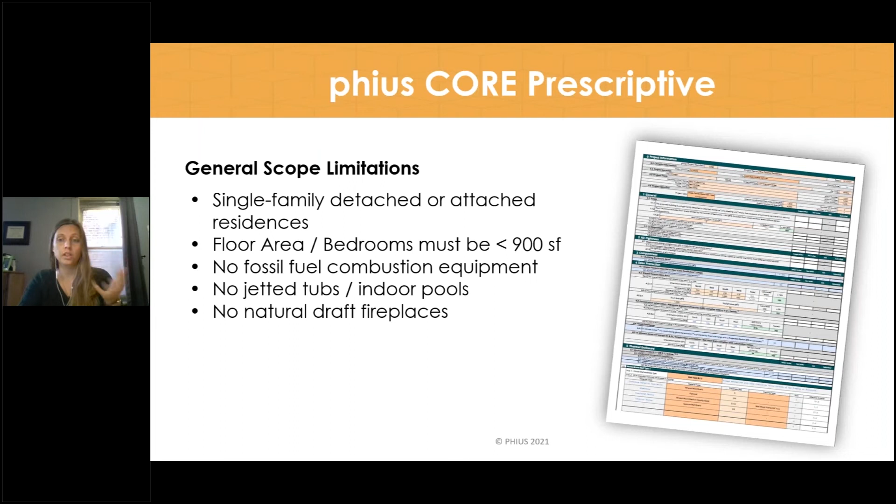There's a limit on floor area per bedroom, so essentially you can't have those McMansions I was talking about. No fossil fuel combustion, no jetted tubs, indoor pools, or natural draft fireplaces. Along with this program checklist, which you can see in the screenshot on the right and which contains all the nitty-gritty details of the program, we have this online tool called the Snapshot.

Essentially, if your building falls within these scope limitations, you can go into this Snapshot and see, okay, here's my building, here's my size, bedrooms, stories. Again, it's my single family building. And this is roughly the levels of performance you need in these different categories: compactness, solar protection, my envelope R-values and U-values, mechanical ventilation, and mechanical systems. So it gives you a rough feel for what you need. It's an early design thing. It's not used for compliance. The checklist is used for compliance, but it's supposed to give you a rough feel of, if I wanted to follow this prescriptive path, these are the project and climate specific requirements I'd have to follow.

Everything else is more of what we call a static requirement or a universal requirement. It applies to all buildings. These are the ones that are sliding scale. And especially the heat transmission section, a lot of these are built from the same optimization studies that we use to build the performance targets. We're just building targets at the other end of the line, right? Our performance targets came from putting certain combinations of these into buildings and then seeing how they perform. We took a step back and said, okay, what were those combinations, and can we figure out what those requirements are?

If we limit the scope quite a bit to that single family, yeah, maybe we can figure out what's required, and we have to limit the compactness. Like, we need to get this as close to the study buildings and cost optimum that we can, and then we can probably put numbers on those. So that is what the prescriptive standard is achieving.

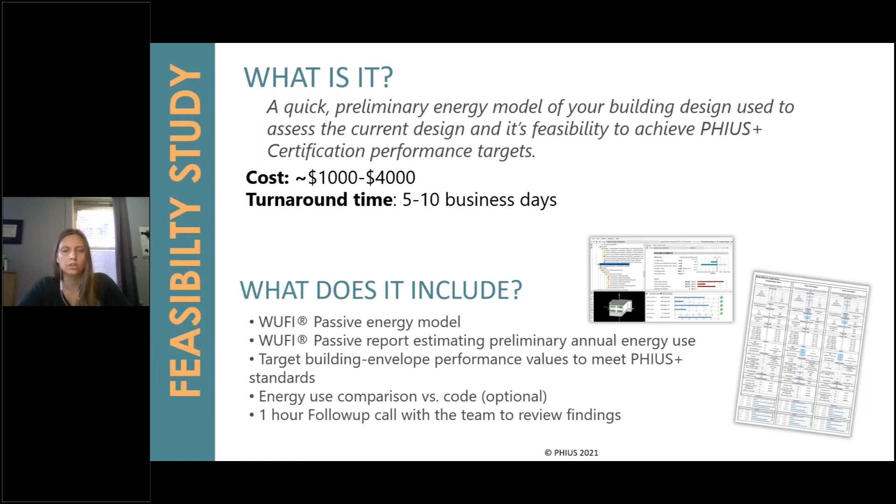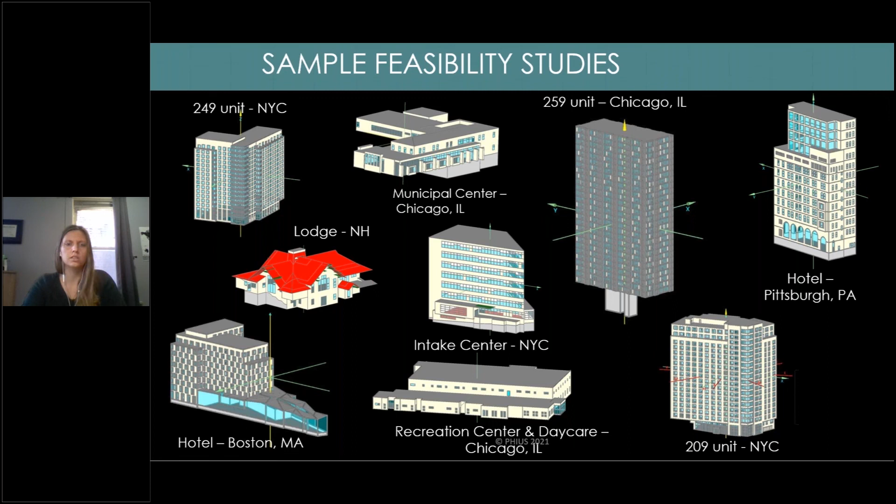And a lot of them actually turn out to be certified projects. So most of these are certified projects now, or at least in the certification process, maybe half of them. But I'd say we have at least a 50% turnover from a feasibility study to certification. So it's pretty good.

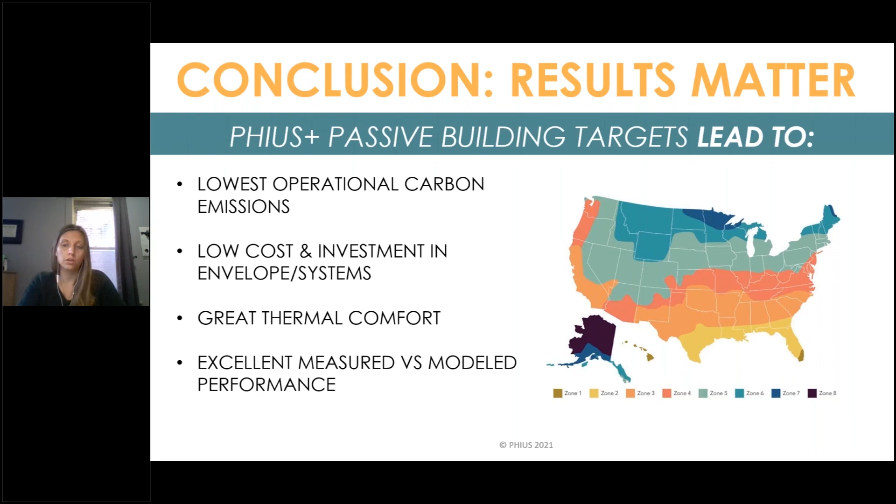Okay, so that is officially the end of the slides.

Great. Well, I do not see any other questions, but where can people reach out to you or anyone over at Passive House if they want to learn more? Yeah, so we have a couple emails.

Maybe I can put them in the chat, they're kind of easy. If it's about training, let me see, I lost the chat. Oh, it's popped out. Okay, if it's about training, you can go to training@fies.org. It's pretty straightforward. If it's about certification, building certification, go to certification@fies.org. That'll actually go to James, who's been answering your questions here.

Well, it's only going to you. I'm sorry, Brett. I'll pass it on to everybody.

Yeah, no worries. And my email is lwhite@fies.org. If you have specific questions or anything about this presentation, I can definitely direct you to the right person at our organization to answer your questions.